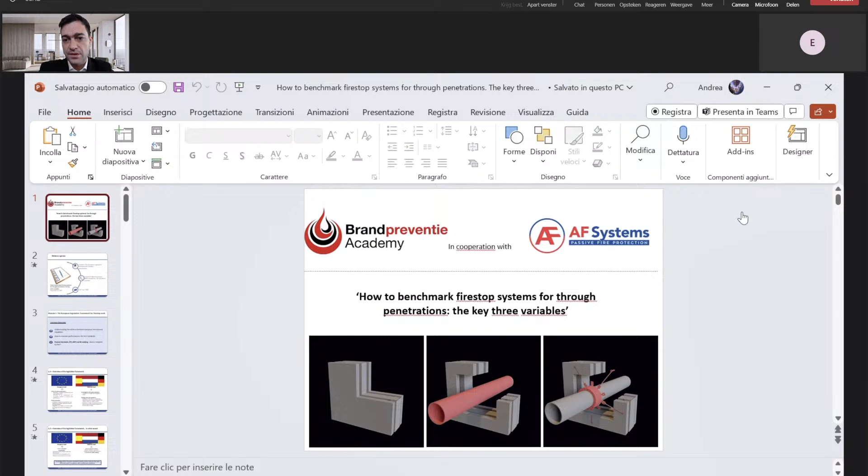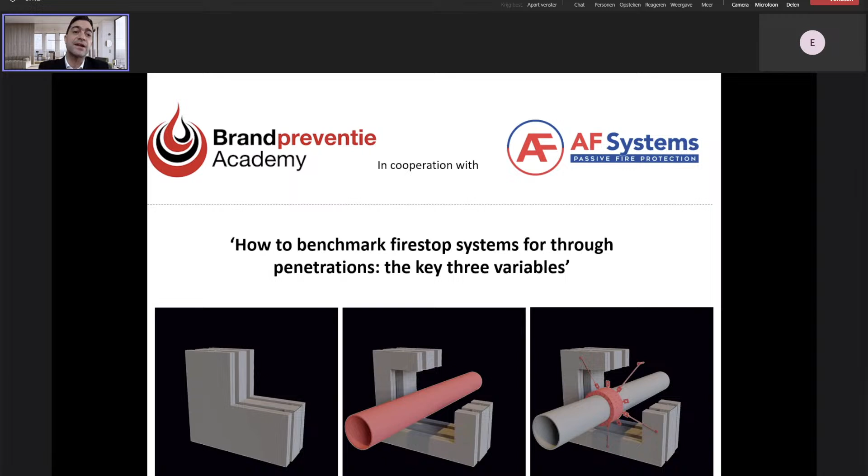Again, it's a real pleasure to be here with you. I'll try to keep this presentation as informative and as interactive as possible. As Emil just said, if you have any questions, if you would like to ask questions after the presentation, you can write in the chat or contact us directly, and it will be my pleasure to give my best to try to answer it.

So what is the program of today? Today we are going to treat two different topics. The first is the legislation framework for firestop penetrations. We talk mostly about European legislation framework and how this interacts with the laws of different countries. After this, we go into how to compare different systems. And this for us is the key. When we talk about systems, we are talking about systems that allow sealing penetrations, service penetrations. This is really the core of our expertise.

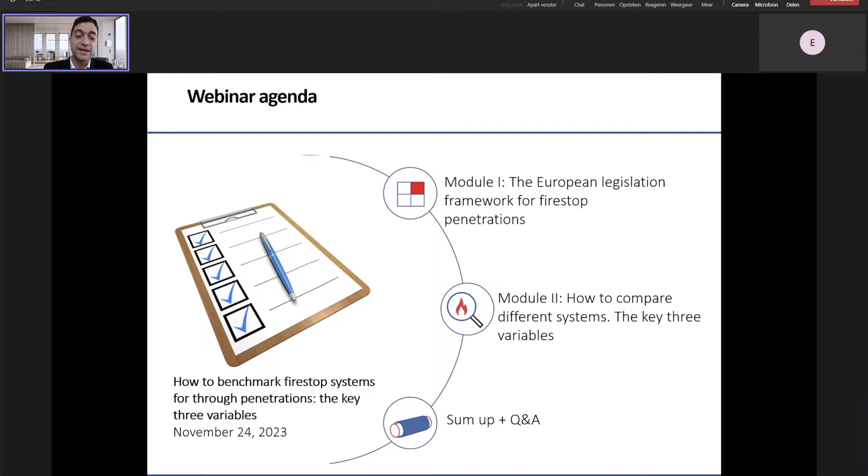We would like to provide you a scheme to compare, to benchmark different systems according to their performance, their budget, and all the level of complexity that you have to keep in mind when applying one solution or the other. So let's dive in directly. Of course, at the end, I'll try to answer all the questions. I'll prefer to keep that section at the end, just to focus really on the topics during the hour of the presentation. But if something is really important, I'll try to watch the chat as well and jump in with the answers.

So let's start with the European legislation framework and why this is so important for passive fire penetrations, and why it's oftentimes misunderstood. We will try to understand the relations between European and national regulations. Then the core of the European legislation, so the performances, how we can measure one system against another. And finally, we go through all these specifications that can sound bureaucratic, but at the end of the day is what really matters when we want to put on paper the quality of our works and convey it to the final client what we have been working on. So the different documents that certify the performance of the products.

So basically, as you know, European and national legislation act on different levels. The European legislation is really concerned about creating the single market. That means it wants to create a space where products compete fairly to one another, where their performance can be comparable. So if a system resists in case of fire for 120 minutes and the test is carried out in Portugal, the same product tested in Germany has the same exact performance if it has the same assessment during the test. So basically, European law really sets the field and defines all the minimum product standards that should be met to make a product circulate in the union.

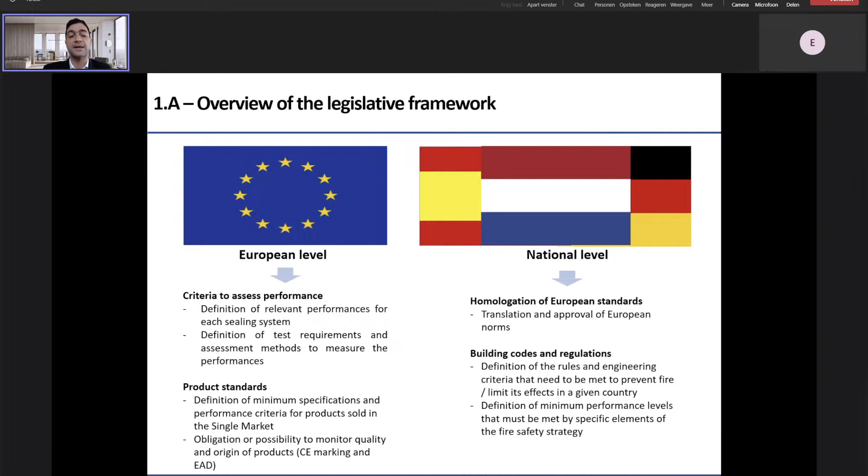So what is useful about this? What is useful to know? At first sight, the European level could even be dismissed as not that important. Once you know a given product has a certain performance and field of application, you may feel your primary duty is just to know the national rules and criteria for your projects. The reality is, and I hope by the end of this webinar you will agree, knowing exactly how test performance works, how products work, can make the difference between choosing the right or wrong system. During inspection, it can make all the difference when you have to understand if the system has been placed correctly or in a wrong way. So if you just focus on the national level, you can miss all those details that would make it work or not.

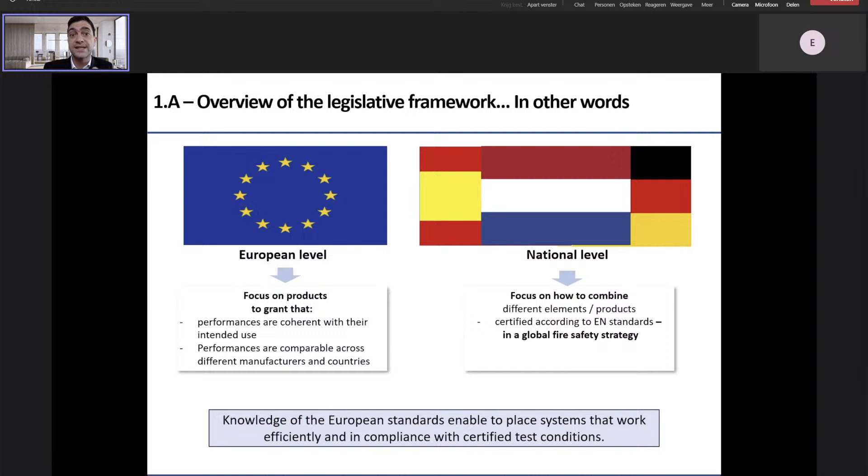I will try to make this clear with a concrete example in the following part of the presentation.

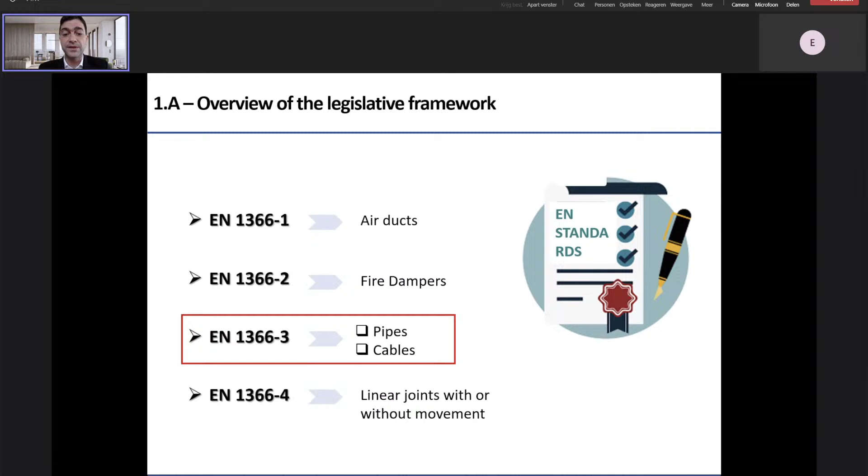Just to give you a quick look, when we talk about European standards, we are talking mostly in this presentation about European test standards. There are tests for air ducts, different tests for fire dampers, different tests for pipes and cable penetrations, different again for joints. Then we have standards for service ducts and shafts, for all this kind of discontinuity that you can have through the support, through your compartment.

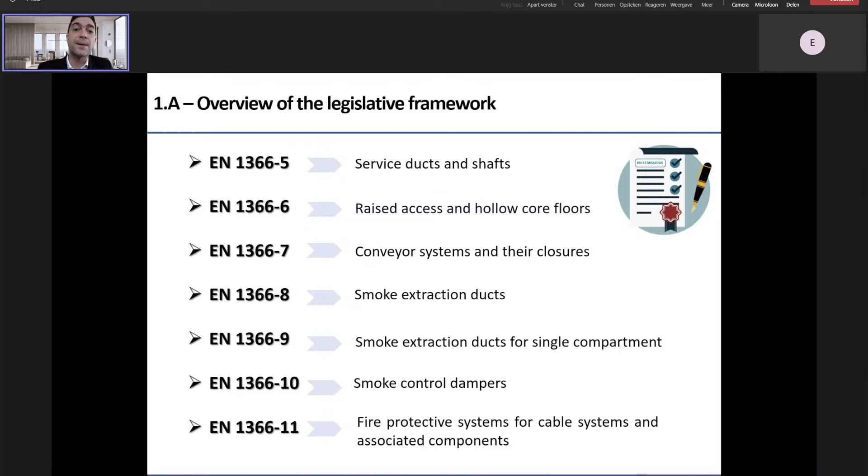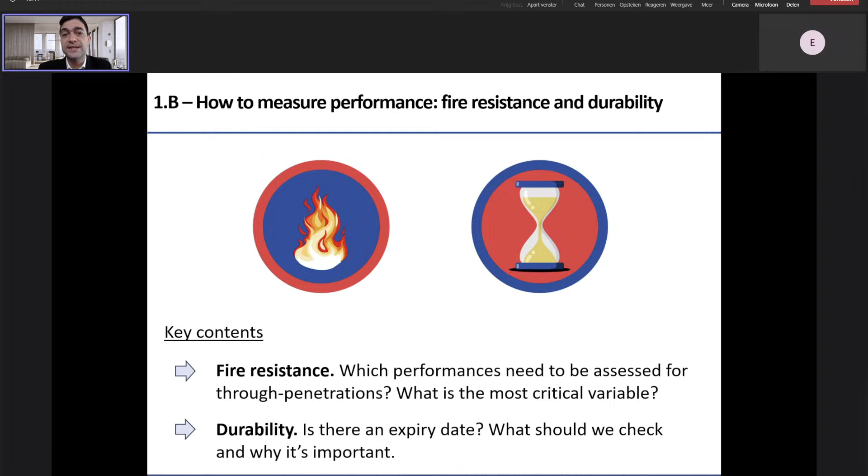The important thing is, we are dealing with fire resistance - what are the performances that I really should care about in all these different fields of application? The performances repeated throughout all the standards as mandatory for those who want strong certifications are fire resistance and durability. Fire resistance, of course, because we want to guarantee our products work in case of fire. But durability is equally important, and I will show you why in a second.

When we talk about fire resistance, this is really the basic concept. All of you will surely know them, but there is still frequently a wrong use of these concepts in practice. There are three fundamental performances that combined make the fire resistance requirement. The first is R - the load-bearing capacity, the mechanical resistance of the element. Of course, if a wall or floor needs to provide fire resistance, it must not collapse in case of fire. So basically we measure in minutes how much time this element resists in case of fire.

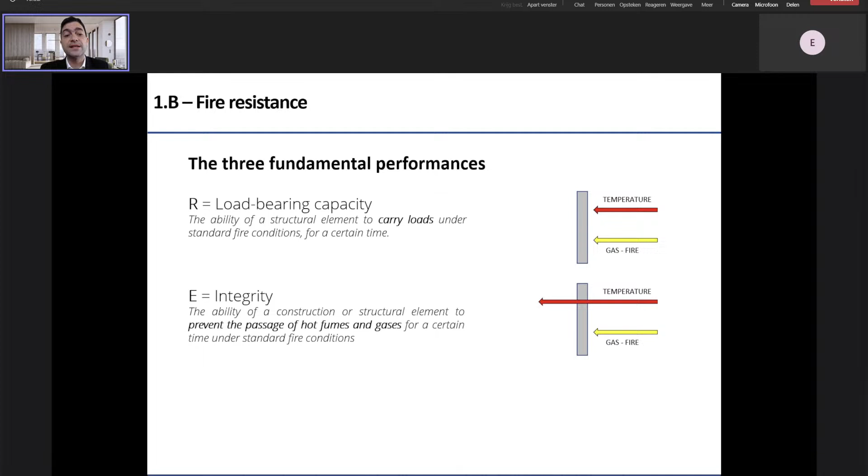With integrity, we look at the passage - if you have two compartments and a fire occurs in one of them, we look at what happens on the other side. On the other side, there should be no communication; there should be a barrier to smoke and flames.

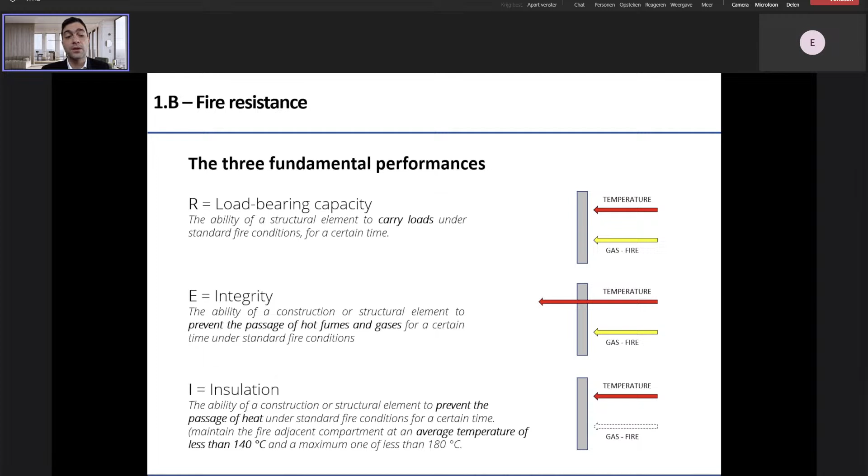Finally, insulation. Not only does my system need to provide a barrier in case of fire, but also needs to ensure the temperature in the compartment where there is no fire stays below a certain level - below, for example, 140 degrees on average as a difference compared to the environmental temperature. So if we place a system, for example a collar to seal a pipe penetration, after 1 hour the temperature in the room with fire will be like 900 degrees. On the cool side, the temperature should not exceed 140 degrees above the external temperature. So you see, it's such a dramatic insulation that we need to provide within the width of the wall or the floor.

And here already the first questions, just to make it more interactive. So in your opinion, what is the hardest performance to achieve for certain time lengths with through penetration seals?

This is a question that we propose quite a lot in our webinars across Europe. And we ask you, imagine you are a manufacturer going to test one of your fire-rated systems, for example a firestop collar, and ask yourself: what is the hardest performance to achieve? If it has to resist for 90 minutes, should I be more concerned about the R, about the E, or about the I? I'll give you a few seconds to think about it.

And the answer that you get the most is integrity. So people think that the most critical variable is really the capacity to have a barrier in place during fire. The R is wrong because in case of through penetrations, we are not pretending that the system that seals a penetration enhances the level of mechanical resistance of the support. So basically, when we talk about through penetrations, we just focus on integrity and thermal insulation.

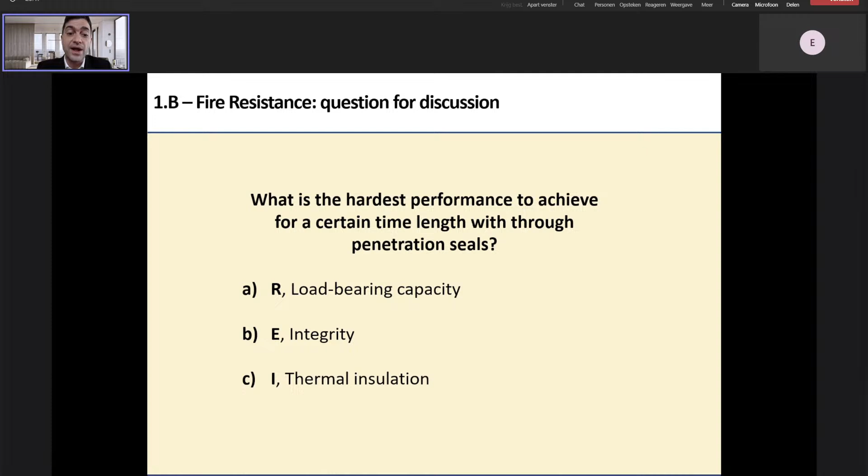On the opposite, if you lose integrity, immediately you lose thermal insulation. So what we are saying is that reaching thermal insulation is much more difficult, because you can have systems that reach integrity without any problem, but still cannot grant thermal insulation for that amount of time.

The other requirement that is very important, and often not taken properly into account, is durability. We really care a lot about this requirement because when we talk about penetration seals, we are not talking about a system where you have an obligation to change, upgrade, or provide maintenance every 2 or 3 years. Basically, these systems are made to stay in the building for a lot of years, for 10, 25, even 100 years in some cases.

So we have to be sure that the product will act as we expect when and if a fire occurs. Not today, not when we buy it, but after being exposed to conditions like high humidity or temperatures below zero. In 10 years, if a fire occurs, it should work as when we installed it. So how can we give this kind of requirement? How can we characterize the products through this variable?

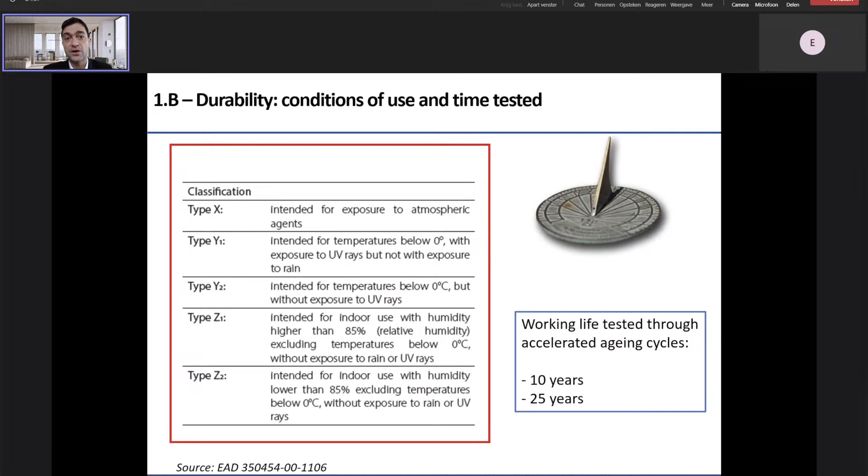And now we come to a very difficult question. I hope you have your coffee next to you, because we're going to ask you to jump to our side, as a manufacturer. Think about what is the most common condition of use that you want your products to be tested against. The more you go towards the X category, the higher the cost of testing. But you also may not want to test products to obtain a Z2 category, because the applicability would be too limited. So imagine you are placing your products to be tested in a durability test. Which category would you choose, and why?

What I can say here is that in most cases, manufacturers want to obtain a Y2 category. Our systems, through penetration systems, are usually not directly exposed to UV rays and are also not directly exposed to rain, snow, or other atmospheric agents. They are not on the roof of a building. So Y1 or X category is not something you're really too concerned about in most cases.

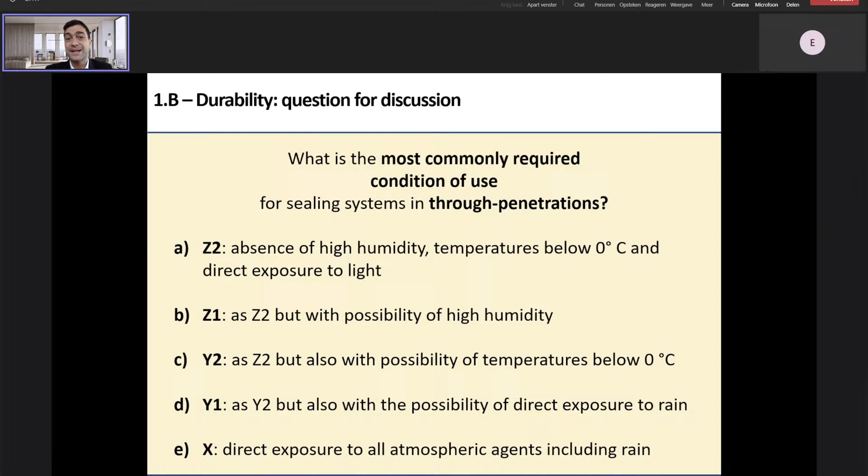But what you are surely very concerned about is that your product really fits conditions of high humidity and temperatures that can go below 0 degrees, because many times these products are placed in underground parking without heating systems that can grant higher temperatures. This is something that is always often missed when analyzing a certification, but can make all the difference. We see so often at work sites collars that are completely oxidized, and it's very difficult to believe these products can work properly if they're not tested against high humidity conditions.

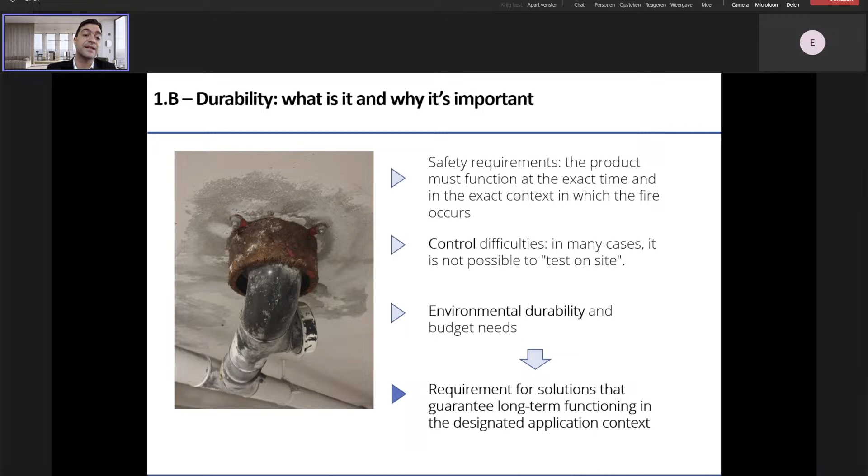So, for example, if we talk about a material that should last, in our experience we should always look for an inoxidizable stainless steel material. As you know, if you have a metal material that you put in place, or some kind of external finishing, that really conveys this requirement of resistance to humidity.

So basically, we dealt with the fire resistance requirement and we dealt with durability requirements. The last part of this first section of the presentation is about certification. I hope not to lose all of you on this part — it can sound like the most boring one, but it's still very important.

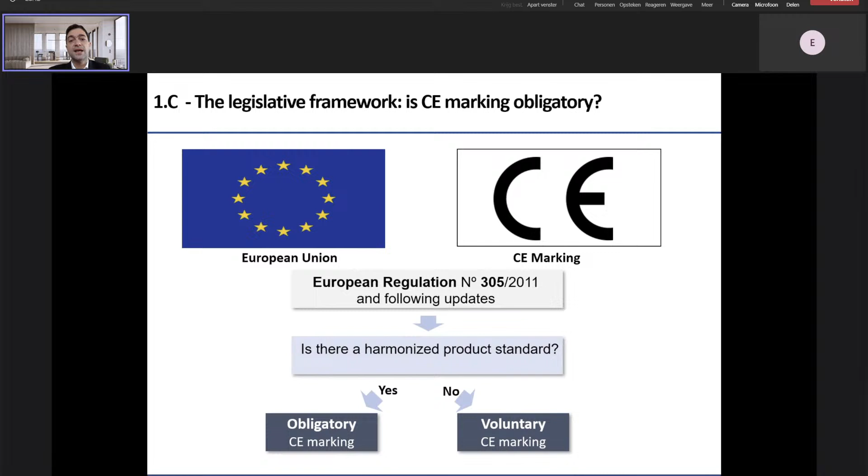We need to make a clarification. The question is: is CE marking obligatory? The answer is that we cannot give one that applies to all products. There are certain products like doors, curtains, and dampers that have their own product standard. If there is a product standard — if within EOTA, the European organization that makes the standards, there is an agreement on what a fire-rated door, a fire-rated curtain, or a fire-rated damper is — then CE marking is obligatory. So for these three products, you always have CE marking.

When we talk about through penetrations, in most cases we are talking about collars, bricks, bags, panels, foams. In some cases we can also think about joints — it's not a penetration, but it's still a discontinuity, an opening. In all these cases, there is no agreement at the European level on a specific standard, and there is no mandatory CE marking.

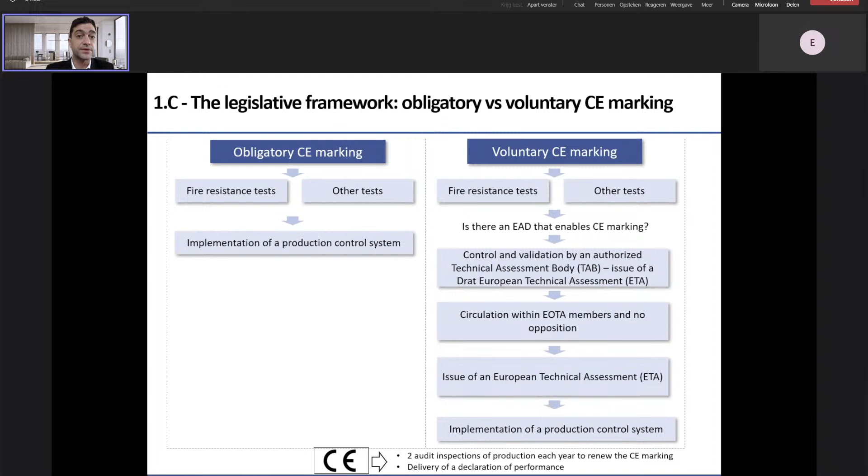This CE marking lasts 12 months. It's only renewed if manufacturing audits pass these inspections, and it's really a certification of quality that you bring to the market. So not obligatory, but it still marks a difference in terms of the quality that we can convey to the market. Manufacturers that have their manufacturing under control usually want not only a European technical assessment, an ETA, but also a CE marking on their products.

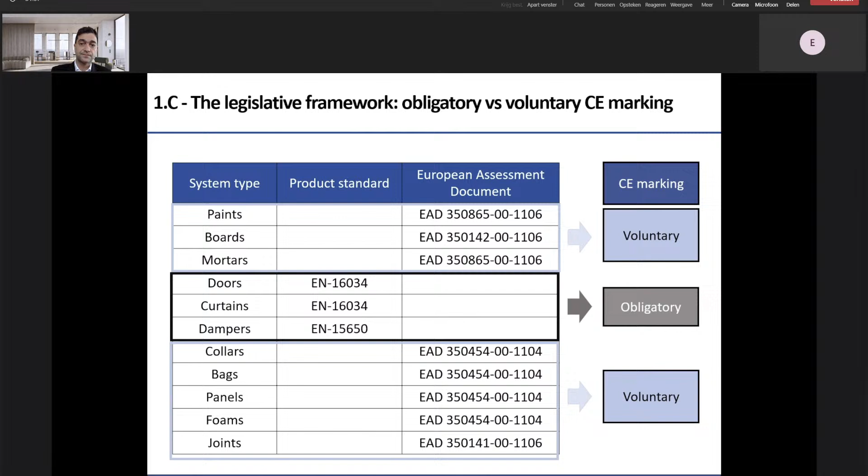And this is also the possibility to place the CE marking. Sorry, the slides were going a bit too fast. The possibility to place this CE marking really is an additional cost for the company.

In the market, when we look at the price level, there is quite a big difference between products that have CE marking and products that do not have CE marking available. So not only the ETA is important if you want to have all results, but also the CE marking plays a role, although it's not obligatory.

So this is a table that tries to summarize all these concepts. The test report is the fundamental document, so you need to test in an official laboratory according to the rules defined by the European level of legislation, all those test standards that we saw before.

All these test reports can be put together in a document called European Technical Assessment, ETA, that summarizes very efficiently all performance of a given product.

And then if the manufacturing is under direct control of the producer, basically we have this CE marking application. If it's successful, the manufacturer can provide the market with a COP, that is the certificate of constancy of performance, that lasts 12 months, and gives the possibility to the manufacturers to apply the CE marking to the products.

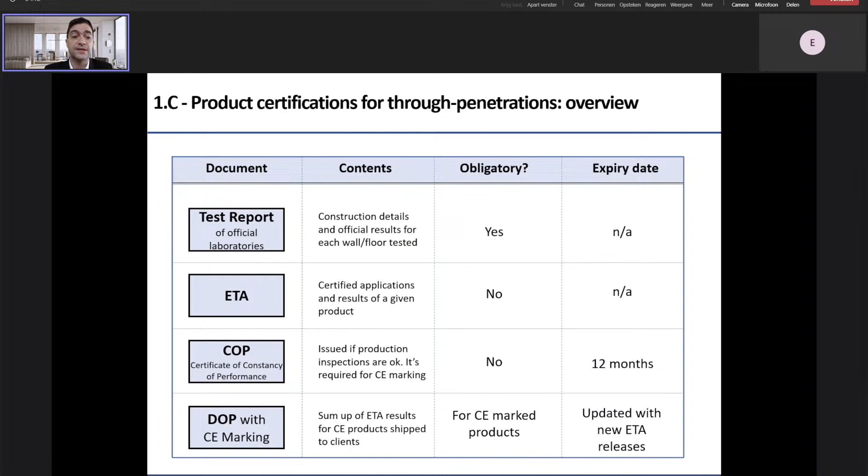So we finished with the first part. The first part was about regulations. I hope you really understood the importance of these two performances: the fire resistance, where we focus on integrity and thermal insulation, and the durability of the systems, especially because we don't have frequent controls in place for this kind of product that just acts once when the fire occurs, and we have to be sure that it will work in that case.

Module 2 really is about giving you our way to simplify a bit the scheme to analyze and benchmark different solutions for penetration seals. So we divide this into 3 subsections.

The first is aimed at providing a checklist to technically compare the different systems. The second one is to acquire better knowledge of the parameters that enable the extension of certified results.

We will see that there is really little scope for extension from test results when we talk about through-penetrations, but we really have to understand how the sealing system works to understand what can work and what cannot. Finally, we should see some of the common mistakes that can really affect the total cost of the solutions.

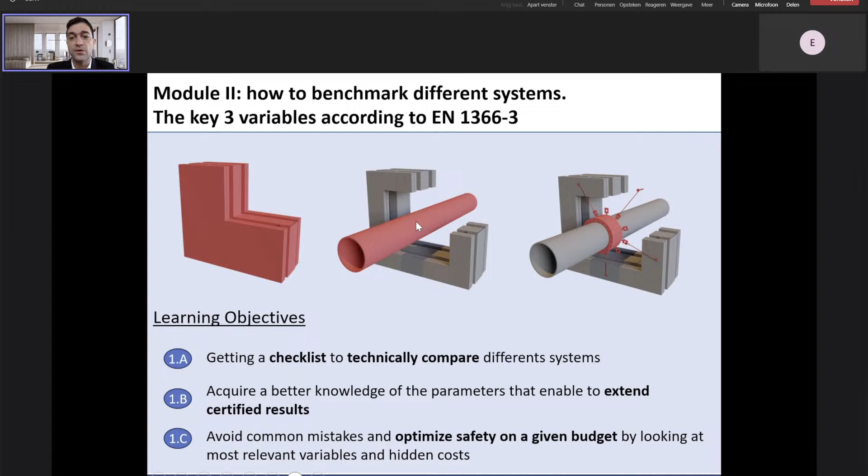So let's start with the first and most important part, the checklist to technically benchmark different systems. When we talk about through penetrations, you see these 3 images: we focus on support, we focus on the passing through element, and we focus on the sealing system.

Starting with the support, why does support matter? Well, support matters because of what we see at the center of the slide: results obtained in worse, more critical conditions are valid for applications in more favorable conditions. This, I would say, is the only general rule that enables extension.

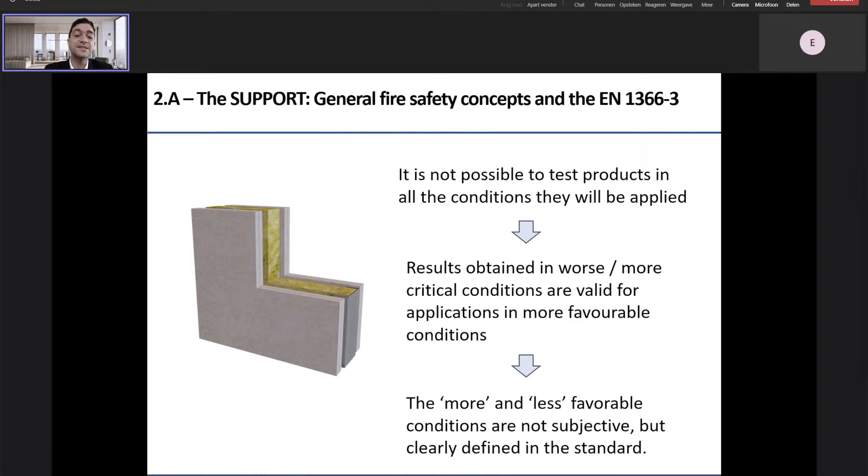And when we talk about supports, we are really in a space where what is more and less favorable is clearly defined. So basically, here we see what this is about.

So we cannot say that there is a worse condition if we test it vertically or horizontally. Basically, our products should be tested on a wall if we want to apply on a wall, or should be tested on a floor if you want to apply on a floor. There is no possibility to extend the validity of results from one orientation to the other.

Next, we have to look at the material of the support. Results obtained on flexible standard supports can be extended to rigid supports of equal or higher thickness. This is key. This is why when you see these certifications, you often see certifications on plasterboard walls, standard plasterboard walls, flexible walls. Why? Because if a system works in that condition, it can work in all rigid walls with higher thickness. And this is, if you are manufacturers, you really want to optimize the number of tests, so you want to test the most critical condition that can be extended towards other supports.

And when we talk about rigid supports, in some cases I need to test solutions on rigid supports. Why? Because the flexible walls sometimes cannot achieve those performances. In some countries, for example, I need to get to 180 minutes for some kind of penetrations, and usually plasterboard walls get to 120 minutes. So basically, sometimes I need to test rigid supports. And here I can also extend results. If I test on a support with lower density and lower thickness, I can extend the validity of results towards supports that are thicker and more dense.

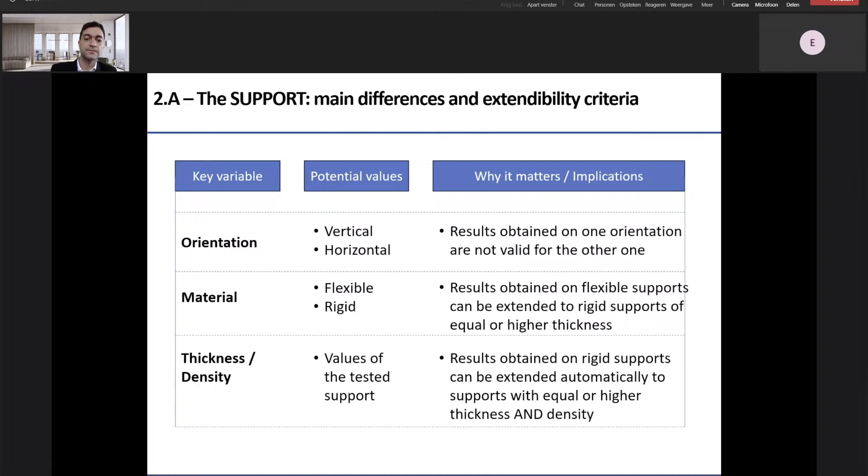Why is this relevant to you? Because when you have a certification, you should not only look at the performance, you should really look at the supports where it has been tested. There are a lot of extensions that are commercially communicated to the market, from supports that are thicker towards supports that are thinner, based on some kind of experience of the manufacturer. There is not such a thing. You can say that something works on a thinner support only if that support has been tested. So this is basically what we saw about the extension possibility from flexible supports towards rigid supports.

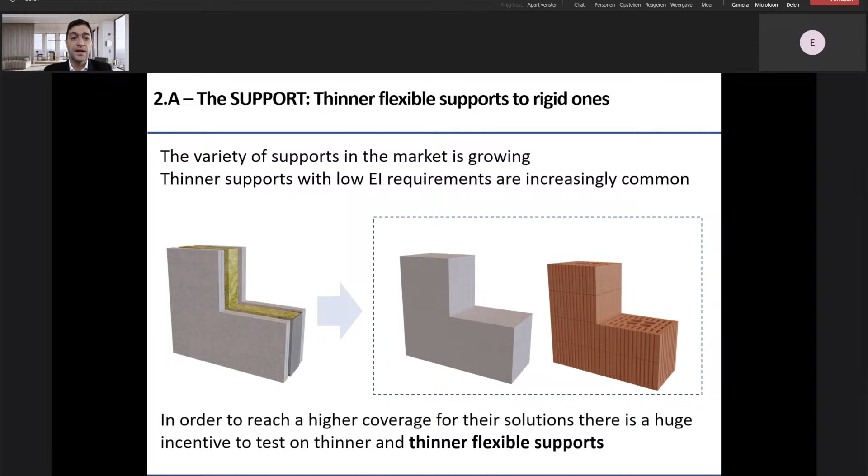So you see that the more time passes by, the more non-standard supports get added to the standard. What is not considered standard is always a sandwich wall or floor. Basically, it has to be tested specifically for each sandwich wall or floor, because there is really no specification of extension possible in the European guideline for this. Of course, common sense is also used, because you cannot test all kinds of different thicknesses of the metal of the sandwich wall and floors. But still, this is to say that you really should look at the variety of supports where the product has been tested. If a product has not been tested on a wooden wall or on a sandwich wall, it cannot be applied to it.

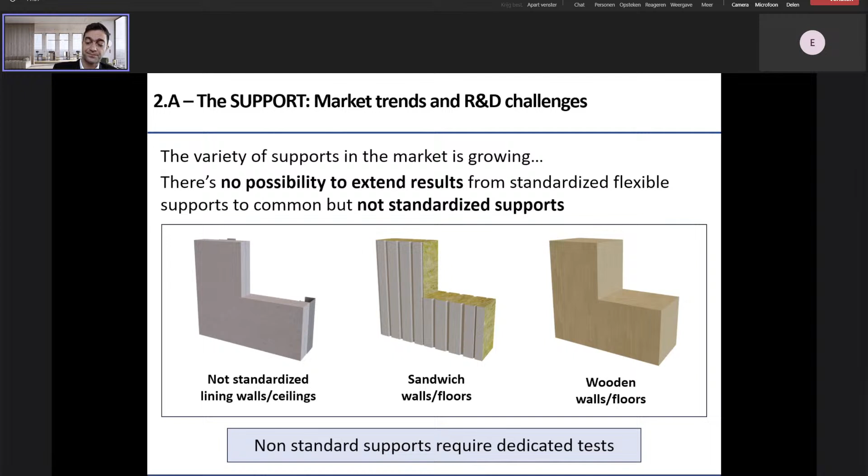Okay, so we dealt with the supports, and now we go to the through penetrations. This is clearly the most important specification. So basically, we can have cable or we can have pipes. This is as summarized as it can get.

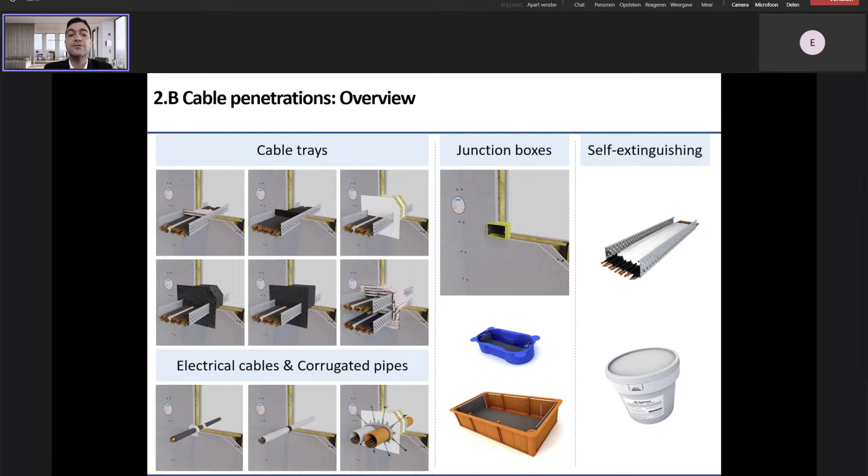When I talk about cable penetration, I always need a support. I always need a support that gets completely crossed by the elements. And the cables can be on cable trays or can be on corrugated pipes. It should not be, but sometimes we even find them without an external protection, without a pipe around, and we still have to deal with this kind of discontinuity.

What we should take into account: there are three sizes of cables that are relevant. 99% of cases in civil construction deal with small cables, with diameter below 21 millimeters. But there are also cables, especially in industrial environments, of medium or large size. This matters because the system that works for small cables doesn't necessarily work for medium or large cables. Also, in our product range, when we tested for medium and large cables, we needed more sealing depth, more protection within the penetration.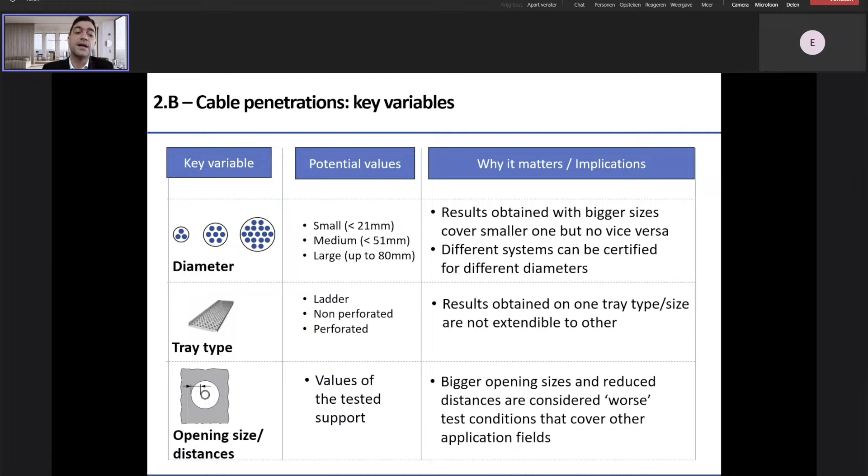The second specification is the tray type. Of course there are different tray types, so if I provide a solution for a specific tray type, I should be sure it's covered in certifications. Finally, the opening size. This is not specific to cables - we should always fill what is around the penetration with fire-resistant material.

Here we see an example. We see two openings with cable penetrations, and what I was referring to before. This is out of our catalog, so I don't want to make this a commercial in any way - I just want to say that for small cables we use 120 millimeters sealing depth, and for large cables, or even mixed configurations, we need 200 millimeters.

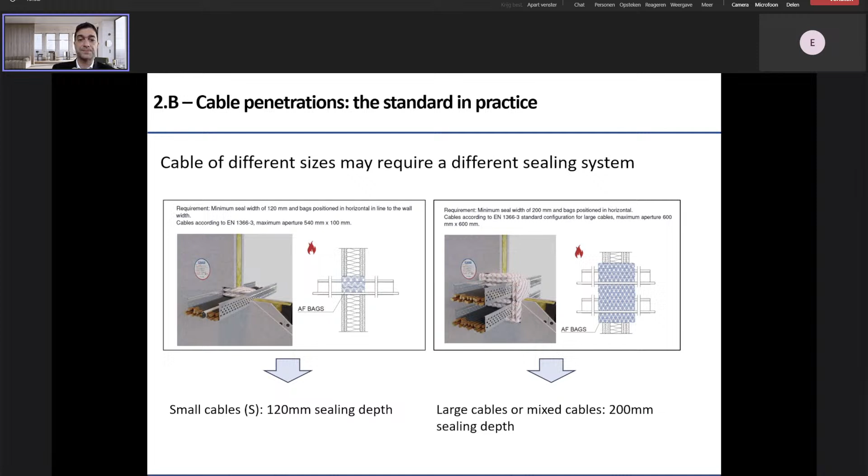So you should really look within the certified configuration at what has been tested for the size of the cables. It can get complicated because, at work sites, every opening can differ from one another. In the standards, what's been defined is called a standard configuration. So if the manufacturer tests one of these configurations, you can be sure it's valid for all kinds of cables up to that diameter.

This is another thing to keep in mind when you see openings like 60 by 60 centimeters, with the full range of different cables from small to large ones. You are in front of a configuration that allows maximum extensibility of the results. You can have all kinds of different cable trays in there, and even a different number of cables compared to the one tested. If all the elements of the standard configuration are present, you can be fine with that.

When we talk about pipe penetration, I think it's quite clear now that we need support for this penetration. We divide the space into four blocks: we can have combustible or non-combustible pipes, and pipes with insulation or without insulation. This matters because you treat all these cases very differently.

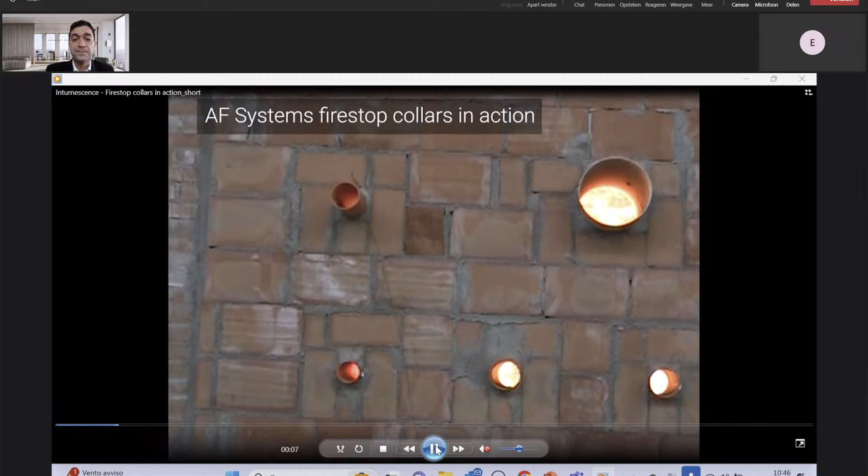So let's see what happens in practice. Basically, this is accelerated 8 times. I'll press play now.

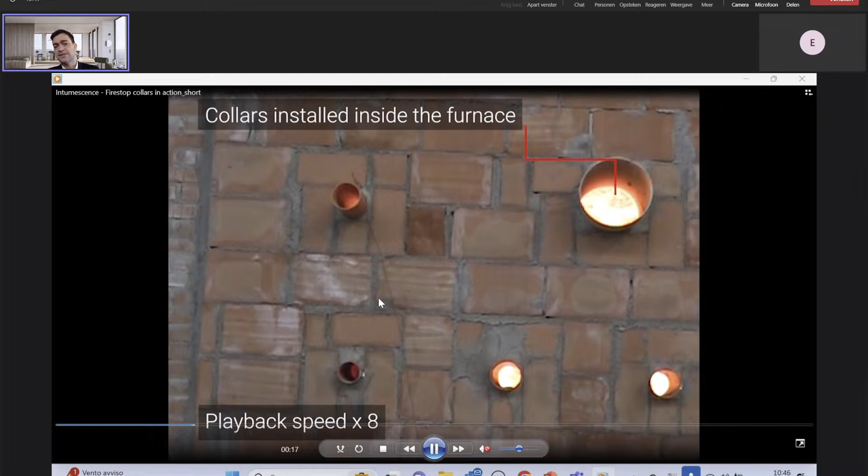These are PVC pipes. It's a very old test, I think made in 2010. You see something is happening now: the opening is closing off. My question to you is, what's happening? Is it the collar that is working, or is it something else?

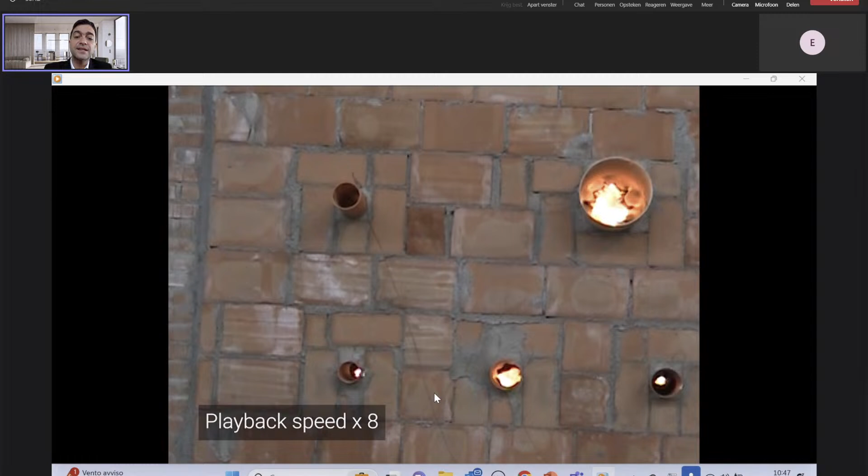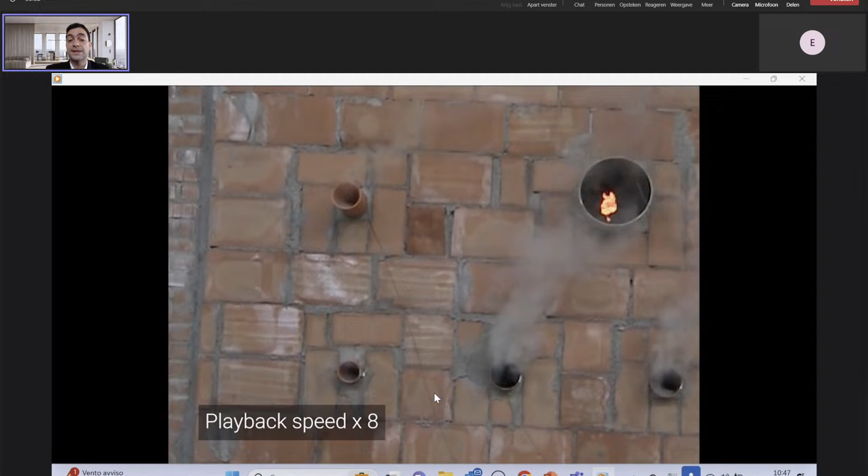The important thing is, of course, that fire does not get through, that the openings are completely sealed in a short amount of time, and the fire does not get to the cold side. So basically, the plastic pipe on the cold side is still intact. This is also a guarantee that the temperature on the cold side is, on average, below the 140 degrees that we were commenting on before.

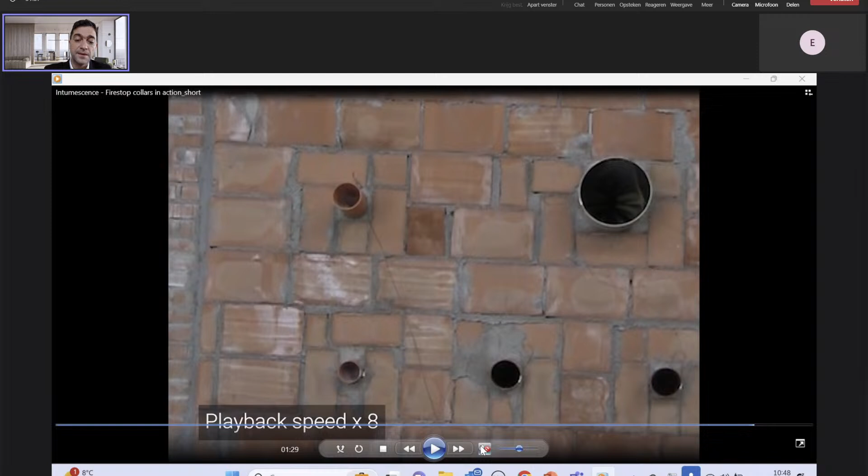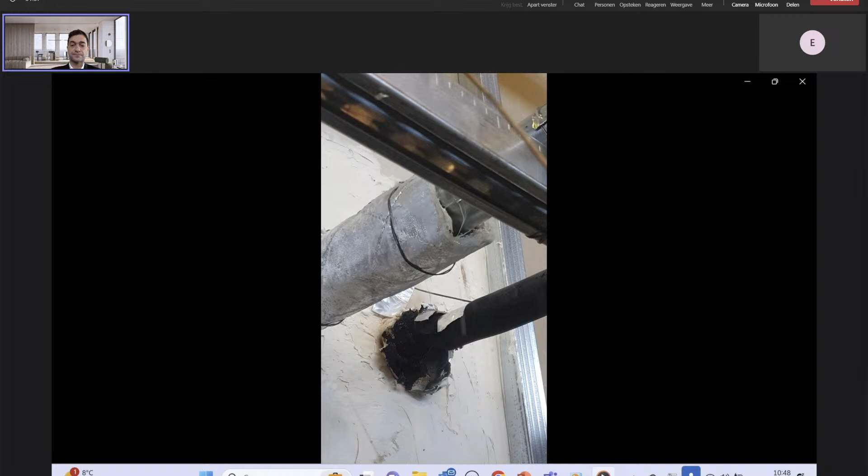So why this video? Because I really wanted to make a point that we need this kind of thermal expansion, this kind of intumescence, when we deal with combustible elements. But then let me go to another video, because when we deal with metal pipes, it's completely different. Steel pipes do not melt down. So why should I protect them? The answer is that I should protect them not because of integrity reasons, but because of insulation reasons.

So what you see here is a coating, a mineral wool coating around a metal pipe, for example. Our aim here is not to thermo expand, to close off an opening. Our aim here is to cool it down, and we do it with this system. We can usually use mineral fiber mats or semi-rigid protections. In this case, we see in action something that is a bit more rare: an ablative coating. So basically, we don't use the thickness of the mat.

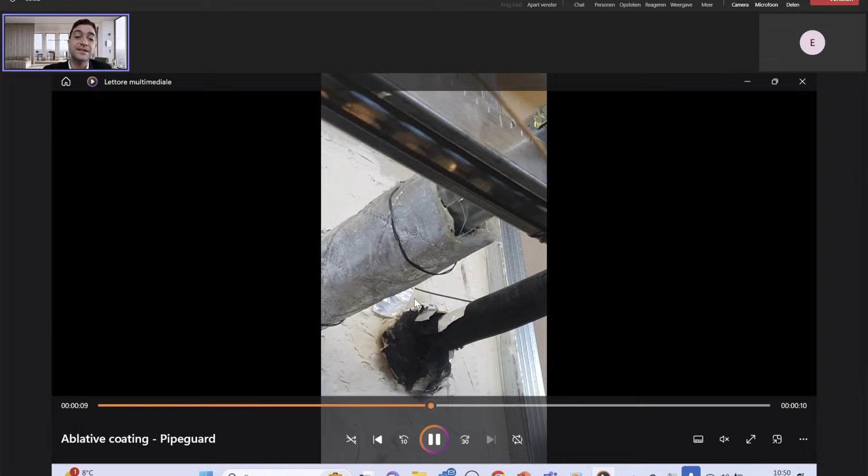We use especially a coating that is on the inner side of the mat that releases water during fire. Since water evaporates at 100 degrees, until the complete evaporation of the coating, the temperature remains at 100 degrees. So you see this system work: it cools down the metal pipe because the energy is not used to increase the temperature of the pipe, but to create this chemical reaction. The chemical reaction is absorbing energy. You see clearly that water is being produced, and until the water is completely produced, the temperature stays below 100 degrees.

So I come back to the presentation now, and I'll get back to the PowerPoint. Right, so here is where we were before.

It's very important that you have this concept very clear. Every time you have a combustible element, you should look for something that thermo expands, like intumescence. Every time you don't have this kind of problem with elements that are combustible and will disappear during fire, then your focus moves towards insulation. If you have metal pipes, you should really find systems that cool them down.

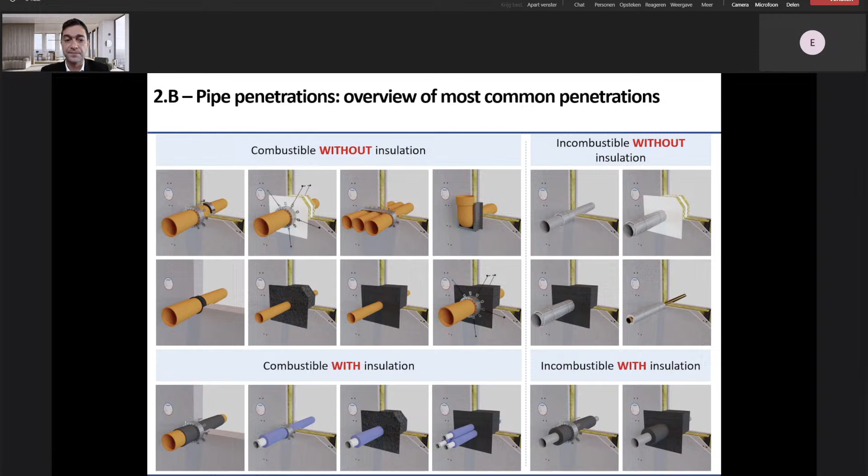I just skip a bit this part. I'll go very fast through it.

Basically, if you have a pipe, of course, test on higher diameter, cover applications on lower diameter if the system is the same, meaning if you have the same quantity of intumescence. Then you should look, of course, at the insulation. If you have a pipe with insulation, results on it should be tested. It's not possible to extend from a pipe with insulation towards a pipe without insulation, or vice versa.

The thickness of the pipes: basically, if you have combustible pipes, there is no way to say that a thinner pipe or a thicker pipe represents a worse configuration. So there is no extension possible. You always have to look that both thinner and thicker pipes are tested.

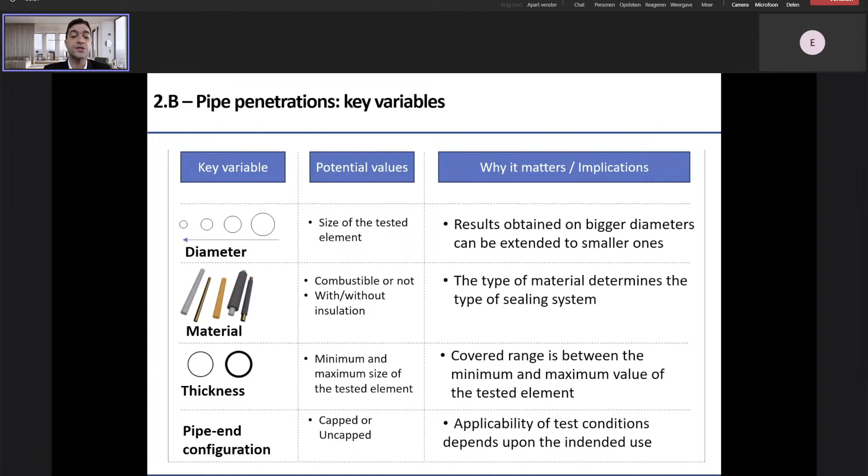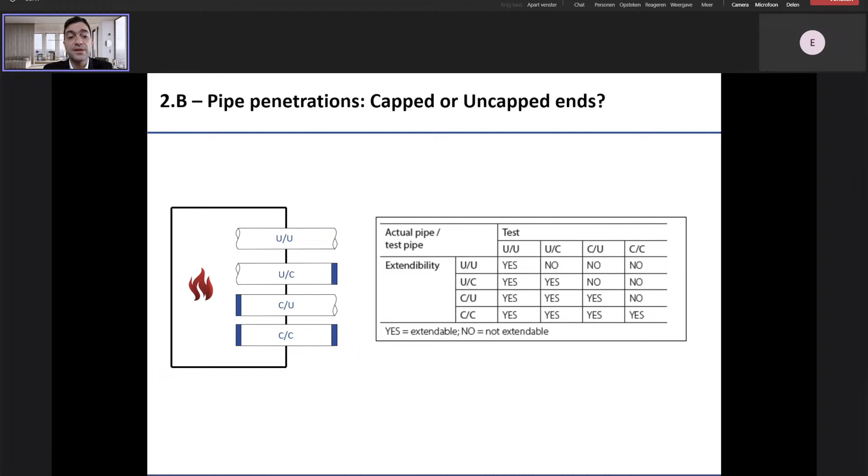Finally, what we said about the pipe end configuration: we already saw that uncapped configuration, completely open pipes, is the most critical condition, but in most cases it's not a UU configuration needed. So when on the cold side, outside the furnace, having a cap is enough. Why is it enough? Because, as you see, this is also what the standard—this is the old version, but it's basically what the European standard recommends.

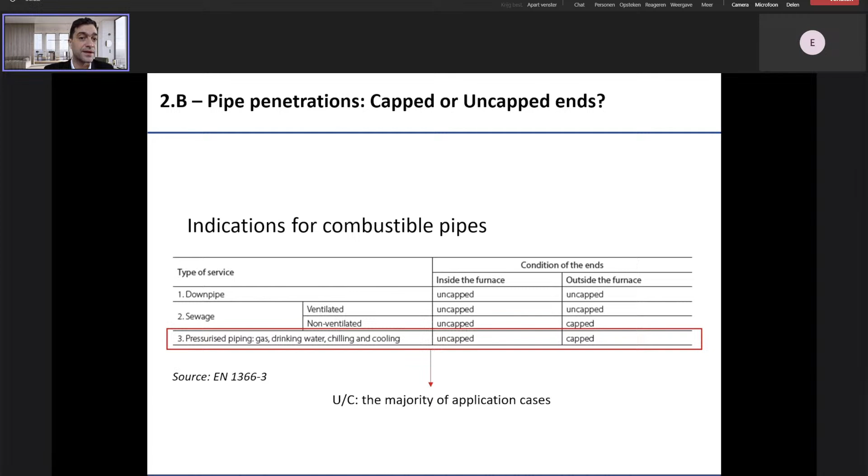If you have pressurized piping, like gas, drinking water, chilling and cooling pipes, you just need an uncapped-capped configuration. So basically, with UU you are sure you fit the requirement, but UC is okay for the big majority of cases.

Finally, the sealing systems. Okay, we are at 7 minutes. We have 7 minutes to go, and I think we are perfectly on time.

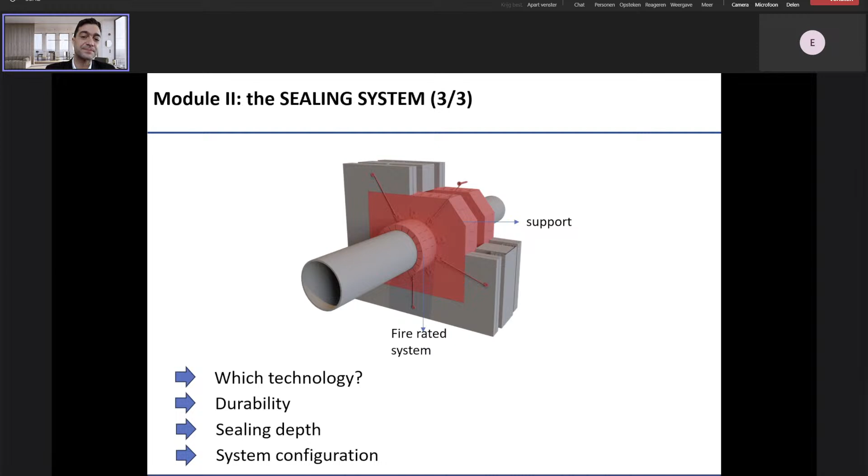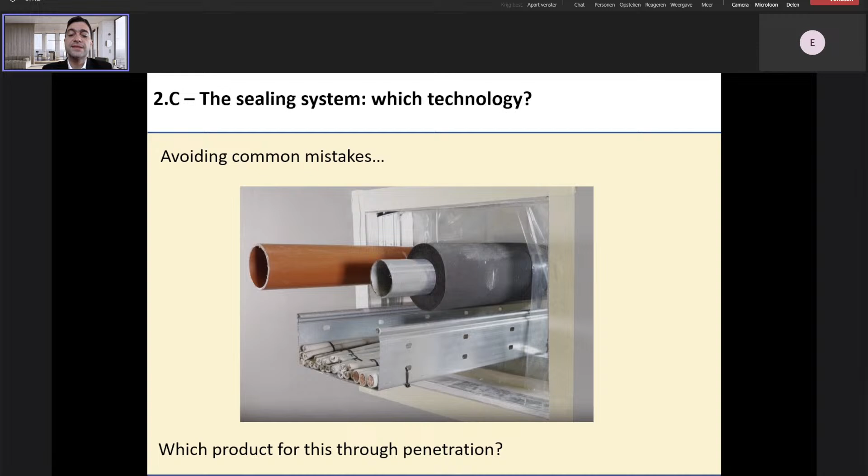Here is probably where most traps hide. Why? Because in practice, in many cases, we see shortcuts. We don't think about what is passing through a penetration, and we don't think about the material that we have at hand. So we see many times that the wrong product is used.

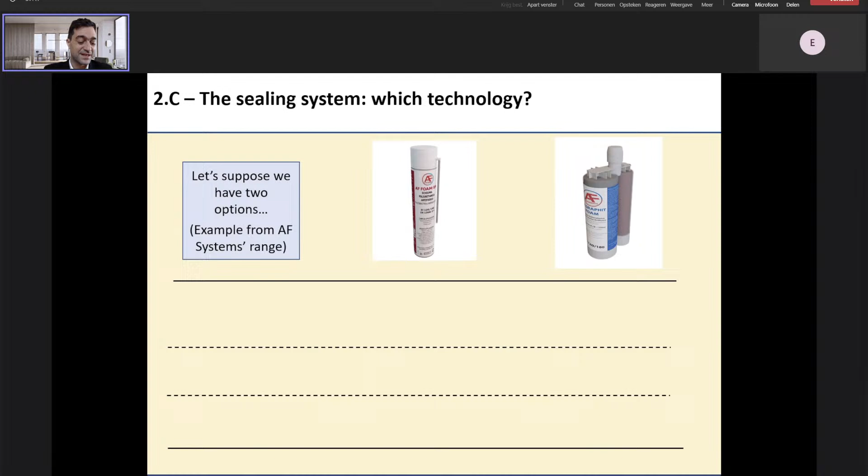Let's make an example with foams. Foams are under huge debate in many countries in Europe, but the reality is that there are good and bad foams, I will say. Foams that expand during fire and foams that do not expand during fire. Here we see two products from AF systems. Neither of them is a bad product, but the use is different.

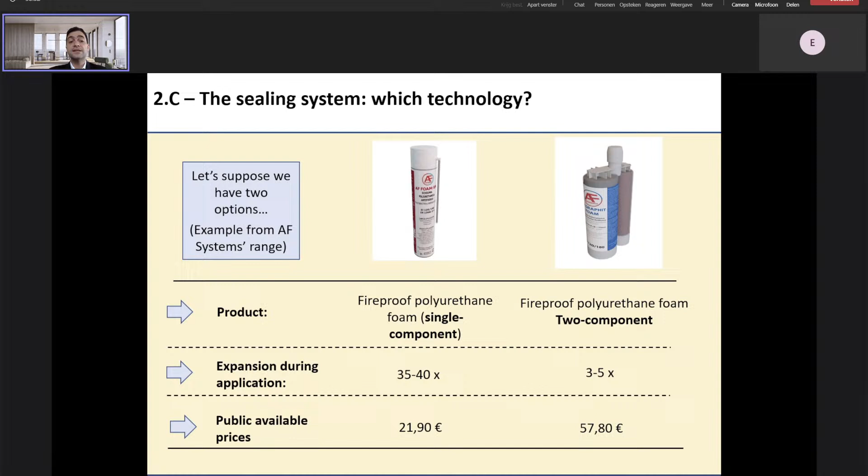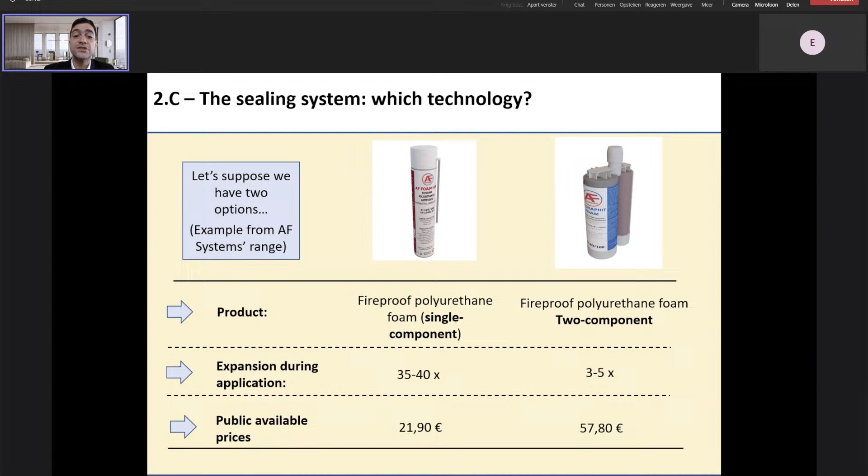These are our old public prices. So you see that the first one is by far cheaper. It's good that we can talk about our own products so we don't get claimed by other companies. Here is what you see also across the markets: the monocomponent, non-expanding foams are clearly cheaper than the two-component expanding foams. And the point is that if one looks only at this data, one should always go for the polyurethane single component foam, because it's more product, it costs less, and it's EI 120 like the other one in terms of performance.

But then we should really look at what is the allowed, certified field of application, because the first product is always only good if we have empty openings. Since it does not expand during fire, the single component polyurethane foam—usually you see it in pink in most cases—it's only good for joints, for openings without major combustible elements.

The second one, instead, expands—it's true, expands less, 3 to 5 times, when you apply it—but in case of fire, it expands, and in many cases you don't even need to put additional collars because it does it all. It has all the action to replenish what's disappearing.

So this is important because there is no good or bad product, but you really should focus on what's the material of what's passing by. We see that if you have combustible elements, you need some kind of thermo expansion or a mechanical closure that comes at some point.

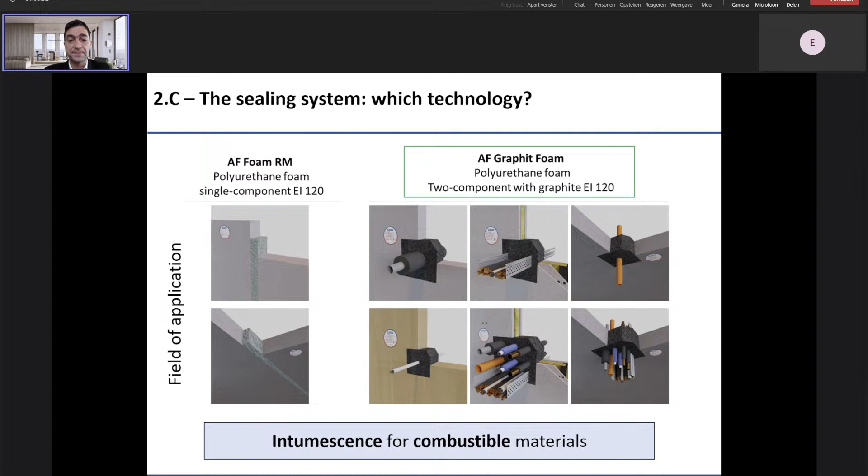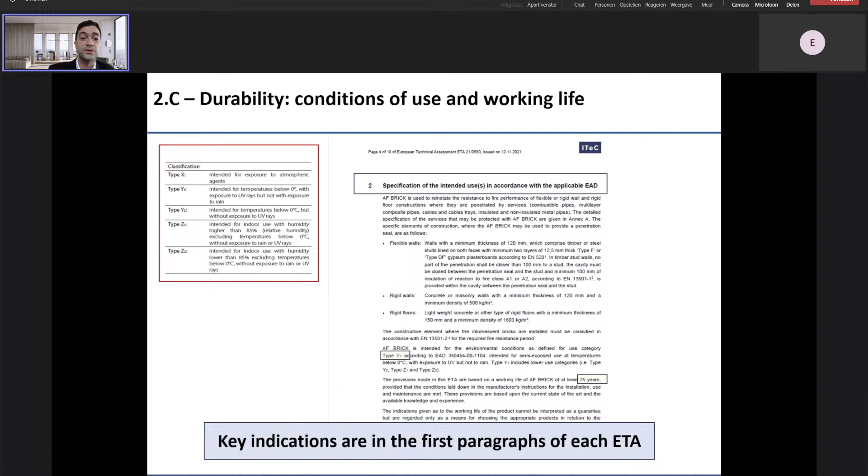Here, another thing you should look at when choosing the product to seal is what we referred to at the beginning, the basic concept. So basically, this is our ETA of the intumescent brick. In the first pages of each ETA—not only of AF Systems, but of every player—you see this kind of data like Y1, Y1 condition of use, so high humidity and temperatures that can go below 0, and how much time, 25 years, which to our knowledge is the maximum that you can certify against according to the standards. So this is something you should look at in the ETAs, not only the performance, but also the fire performance and the durability.

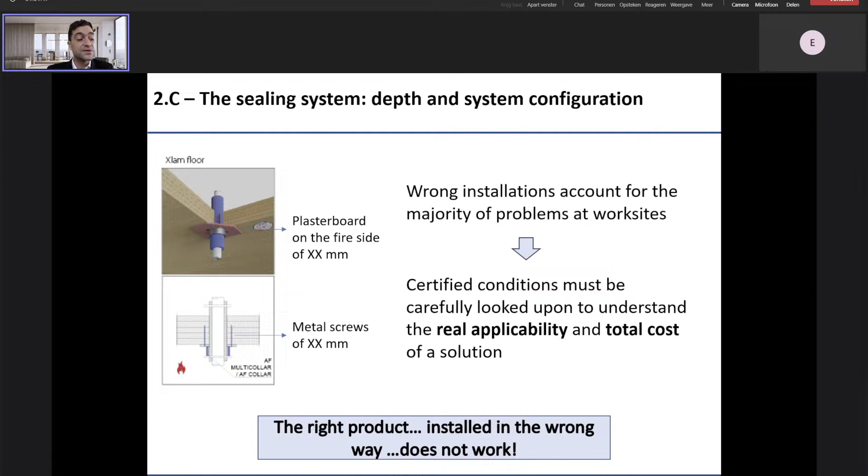Again, another thing you should definitely take a look at, if you have looked very well at certification—you should look at how it is installed, because here is where most of the traps are really hidden. I'll show you with one example.

So let's imagine that we have—okay, this is a very difficult example maybe for this hour, we are at the end of the webinar, but I will guide you through it—let's imagine that you have this opening, and you have an intumescent brick of a given size. Let's say in our example it's 300 millimeters times 50 millimeters. My question is, how many bricks do we need to seal the opening?

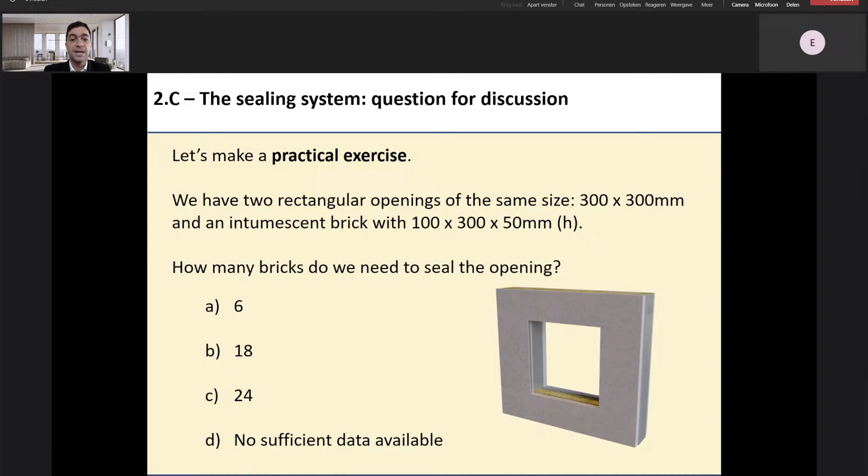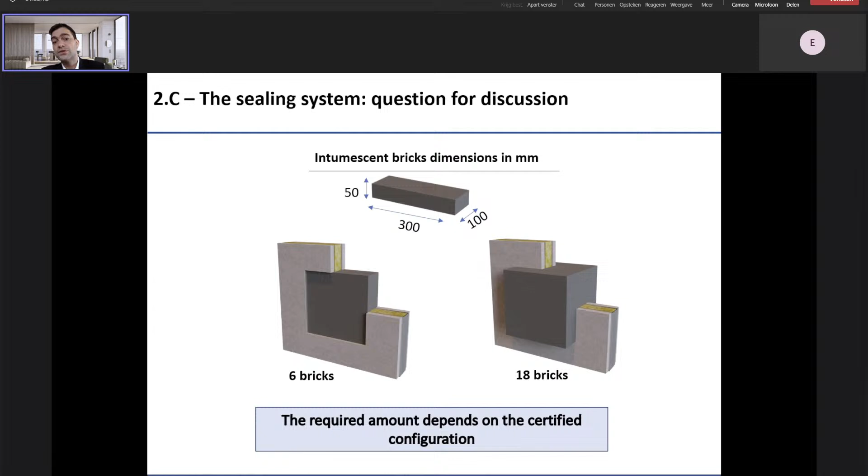The right answer is that, of course, it depends on the configuration. How has this brick been placed during the test? If it's been placed with the short side as sealing depth, you can just use 6 bricks. But if it's been placed with the long side as sealing depth, then for every level you need 3 different bricks, and you need 18 bricks in total. So it's not only the opening size or the product you choose, but you also have to understand how it has been placed.

So basically, you should not stop at the cost per product to understand how much it costs to place a correct installation and do your work properly. In order to optimize your budget, you should compare all the costs of the solution.

It's like when we book some flights, and the costs on one website are completely broken down, you have to add everything up, while in another case it's a whole package. So you can't compare apples with pears. You should look at all the elements that compose the solutions, and the focus should then shift from product cost to cost of the complete solution.

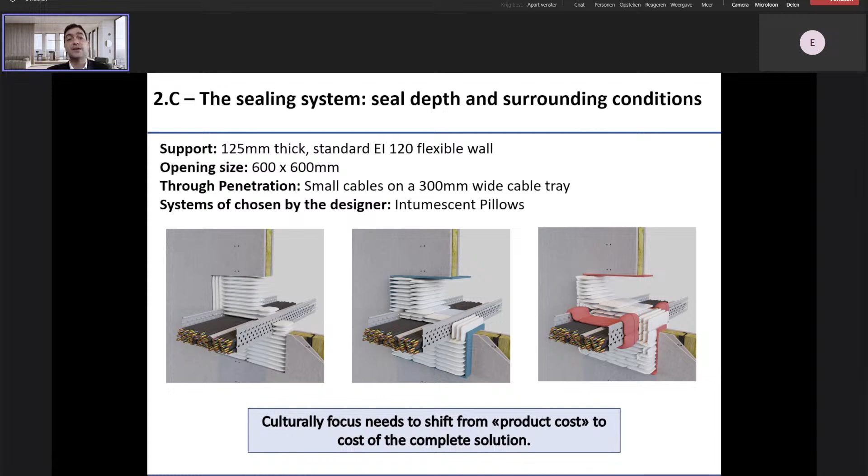Maybe in this example, the cost of the pillow is 2 times higher for the manufacturer on the left, but the cost of the solution is still much cheaper when we take into account the installation, the additional cost, and the other materials. In some cases we even have to paint the cables. So the total cost is the cost of the complete solution, not just the cost per unit of the main product.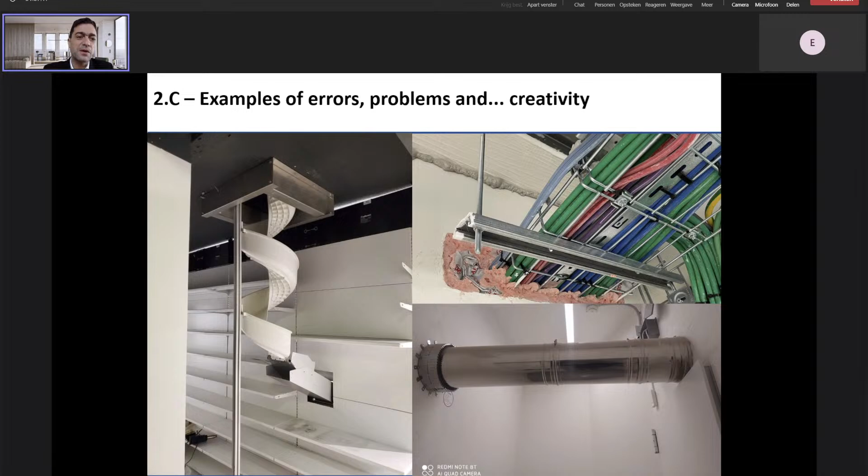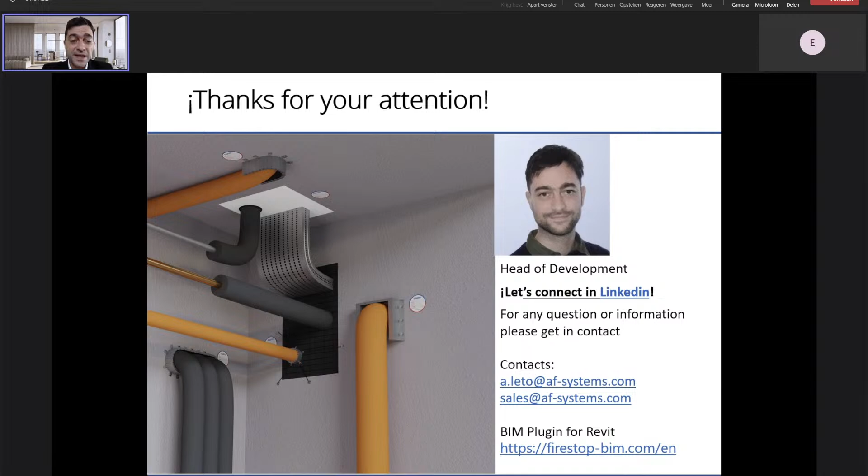So Emil, I'll give it back to you. Thank you for the presentation. Yeah, thank you very much.

It was, as we were talking about before, Andrea, it was not a record in viewers this time, or at least not a record upwards in viewers, maybe a record down, but then everybody got some special attention, so to say.